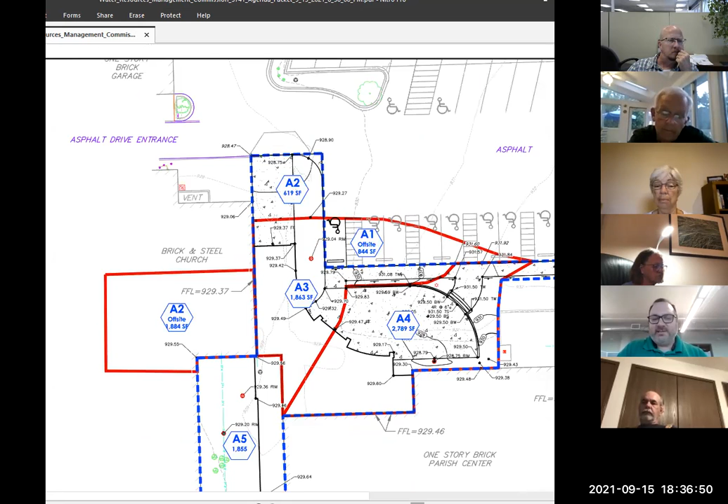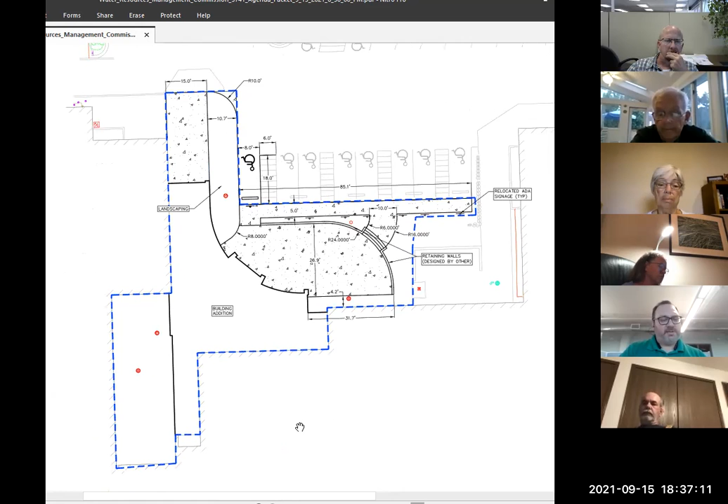So what are you proposing? Just the green space - we will still have about 2,500 square feet of green space on the site, and there will be plantings in those areas, some swales. But yeah, green space is the big one for the infiltration and the groundwater recharge. And then we will have catch basins for the TSS removal, and then some oversized pipe and a restrictor structure for the minimal amount of peak runoff control that we have proposed.

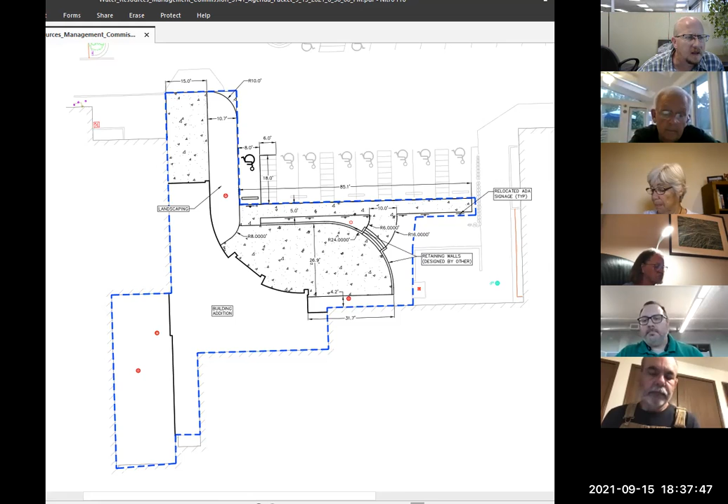So you're proposing to do all these features, and then since you can't meet our standards, pay fees in lieu for the rest? To make up the difference, yes. How much would that be, Eric, you know? Carl has made the calculation. It's only about $2,800.

I have recommended that you guys accept this, but I haven't had time to go through the calcs with a fine tooth comb, so the dollar value may change. And it would still go through Elliot Mergen's review too at the county. But we could make a motion contingent upon you calculating the numbers after the design is all finalized. Yes, that's what I asked for. Yeah, that would be my motion, that we approve fees in lieu with the dollar amount to be determined when the calculations are finished by staff.

Could I ask a question? Yes, sir.

About the permeable surfaces. Aren't there other permeable surfaces that aren't pavers that can be used? Is there a permeable, like a blacktop type of surface?

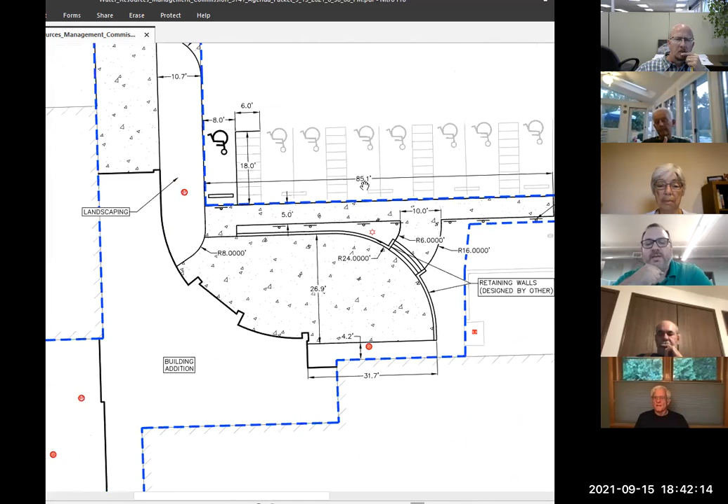You can uncompact soil, so that's not an issue. Well, it's not the uncompaction of the soil, we're concerned with the ground, with the water influence on the foundation of the building. Well, you could still do a good bit of it and not have to worry about that. I think there are ways around it. I don't think you've tried hard enough.

So what would you suggest, then, to go back and see if they can't use permeable concrete and do better with infiltration requirements? Would it just be the infiltration you're looking at then, or all of them too? Because our storm sewer is fairly shallow, that's the only place where we can connect easily on the site, so trying to do any type of underground peak rate control would be very difficult.

Yeah, what I hear is just the infiltration is what we're concerned about. We're concerned about lake flooding and climate change, so I think you got to take another look at it, and look at the infiltration or the peak rate control too.

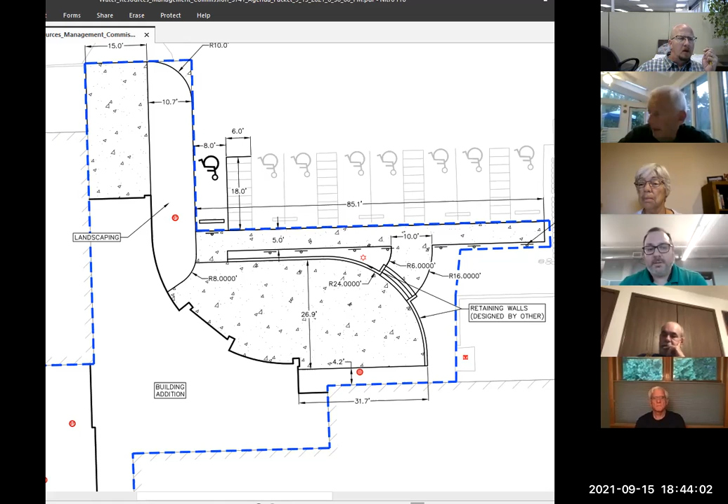Well, we have a motion on there and there is no second right now. Oh, I'll second. So what was the motion? It was to approve fees in lieu. Oh, okay, no, I thought we were sending him back to recalculate, to refigure. We're talking, somebody will have to come up with a new motion. Okay, so there is no second for this motion.

Is there another motion, Sue, that you would like to make about sending it back to refigure the infiltration? Yes, I think we should ask him to rethink about other available permeable surfaces that can be used. So I move. Is there a second for that? I'll second that.

Okay, we have a motion then to send it back to recalculate and try and use some permeable surfaces. All in favor? Aye. Opposed? Motion's approved. Thank you, Carl.

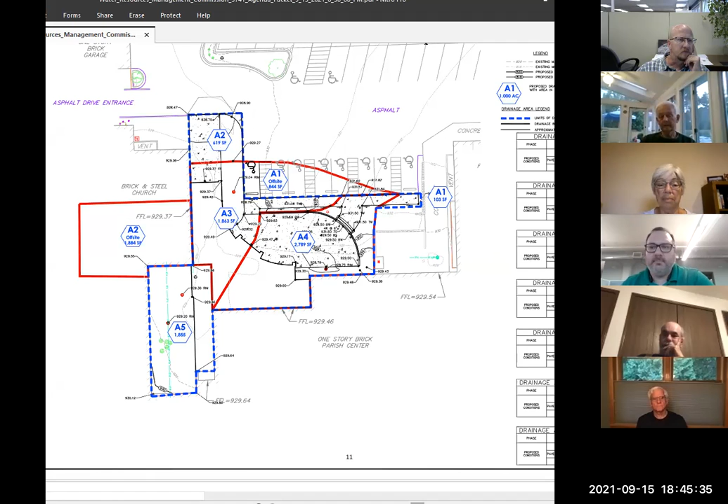Okay, next item of business then is Graber Pond. Jeff Fallon with MSA is here to talk briefly about some H&H work that he did on the new Graber outlet. Jeff, you can take it away.

Thanks, Eric. Good evening, everyone. As Eric mentioned, Graber Pond update. The memo that Eric has on the screen was sent to give a quick pathway from the beginning to where we are now, and then to present some modeling results from our latest efforts, based on the Water Resources Management Commission's direction last June to set the overflow structure weir elevation at 904. And then also to provide some recommendations on how we can move the project forward.

So before I was involved, it looks like in April of last year, there was an outlet elevation set at 902, and MSA proceeded to get into the construction plans for that. Subsequent to that effort, there was a change.

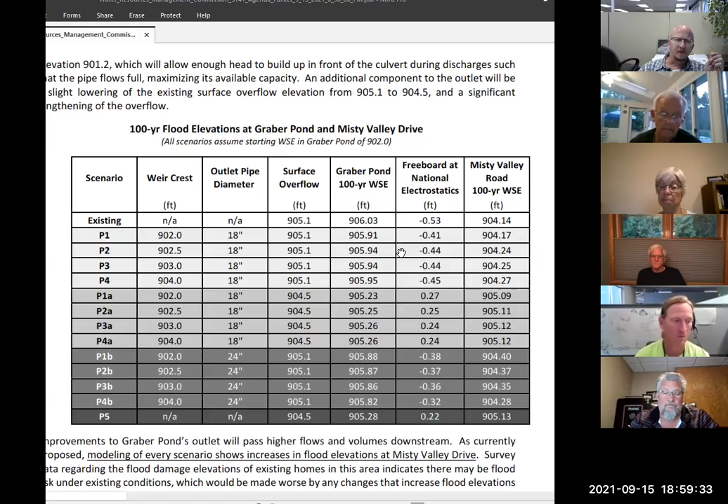I'm not so sure. The DNR earlier this year set an ordinary high water mark of 904.16. And I think it's safe to say that for the better part of the last 4 years, the pond has probably been around 904 or higher. It's certainly lower this year.

So, Bell Farms aside, there will be more development in the future. And even if we can get Bell Farms to do the right thing, so to speak, we're still looking at more pressures in the future with additional volume of runoff coming at us into Graber Pond.

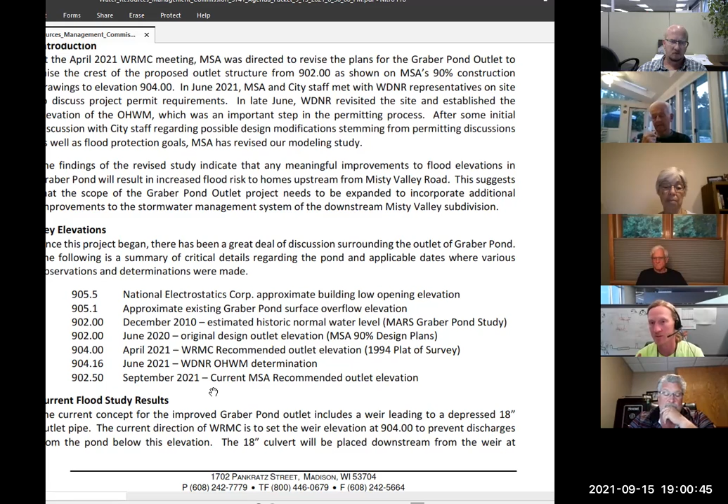To add a little bit to what Eric's line of thought is — he mentioned the results shown in this memo assume that the beginning water elevation in Graber Pond was 902. If we set the model to start at 904, for a scenario like Eric's describing of what it may have been the last few years, or closer to a worst case scenario, you're losing acre feet of bounce in Graber Pond for storage, and the flood elevation ends up going up. It's not shown in this table, but it goes up by half a foot.

So if you want to talk about maybe not the worst scenario, but a worse scenario than starting at 902 — starting with the pond level with your low outlet, whatever that may be, in this case 904 — you're potentially looking at half a foot higher water surface elevation. If we look at this table now at option P4A, you go from having half a foot of freeboard at National Electrostatics to all of a sudden being 3 inches underwater.

Could somebody remind me what the DNR's position is, where they're going to stand fast? How much flexibility are they giving us to go lower? I know they don't want this to be treated as a detention pond. On the other hand, we've got to be realistic about potential flooding down the line in the future. We also have climate change issues. So how do you feel about how strong their position is on what we do here?

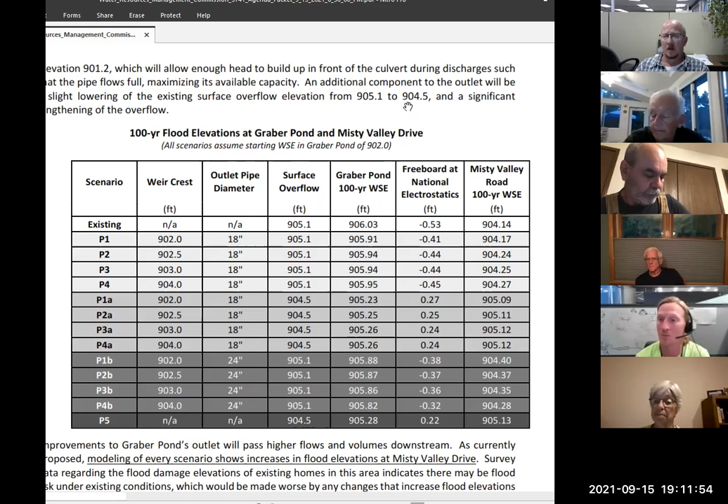Because we'll need an amendment. Yes. Having a flexible weir, having an outlet structure that has range on it, seems like a good idea. It's not that much more expensive, is it, to have an outlet structure that you can adjust? No, I wouldn't think so.

And then we can kind of see how Misty Valley goes, what they end up actually proposing and so on. So if we want to go ahead and get a structure out there, I'd just put a flexible one. That kind of pushes the decision later. Yeah, but at least if something happens, we're in the middle of some issue, at least we have some ability to adjust, right?

Well, that's what your first design was, right, Eric? Yes. Right, and the Friends were opposed to that design. Herb's online, maybe you could tell us why you'd be opposed to that, Herb? Herb was there, just getting unmuted here. Yeah, what was that proposal?

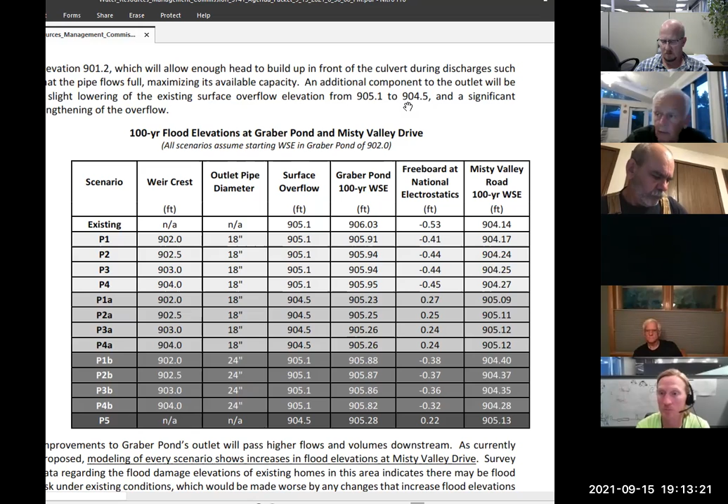I missed that. Well, when we're talking about the preceding outlet structure that was more flexible with a controlled outlet, the Friends expressed some concern about that because of the increased volume of water that may occur. Is that correct? Yeah. We're talking about just going back to that kind of design. Right, and that gets back to increasing the frequency of releases that we were concerned about.

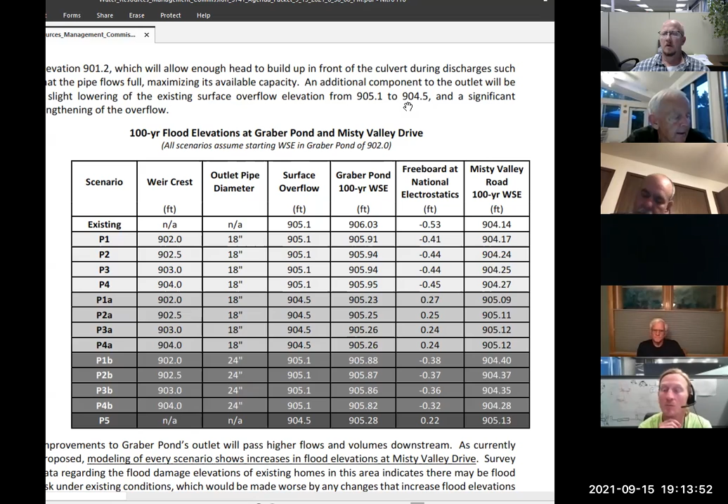But I can see some flexibility there, working that in with the design and improving the design of the Misty Valley stormwater culverts also. So I think it's worth looking at that and then seeing what adjustments would be beneficial.

The one thing I was wondering about is it seems like Electrostatics would have to have some kind of flood proofing for themselves to give them more freeboard. So there's some things that they should be doing for flood proofing because there's still going to be a risk of flooding there that can't be controlled just by adjusting the outlet of Graber Pond. So I think there's some responsibility on their part also.

That's probably up to them to decide if they want to spend the money to do that or else bear the damages. Well, depends, because they could still have a flood risk there no matter what the city does. Well, we know that the 100-year flood doubled from 2001 up to 2020. So we're looking at the 100-year flood today, 10, 20 years out, it may well be twice as much.